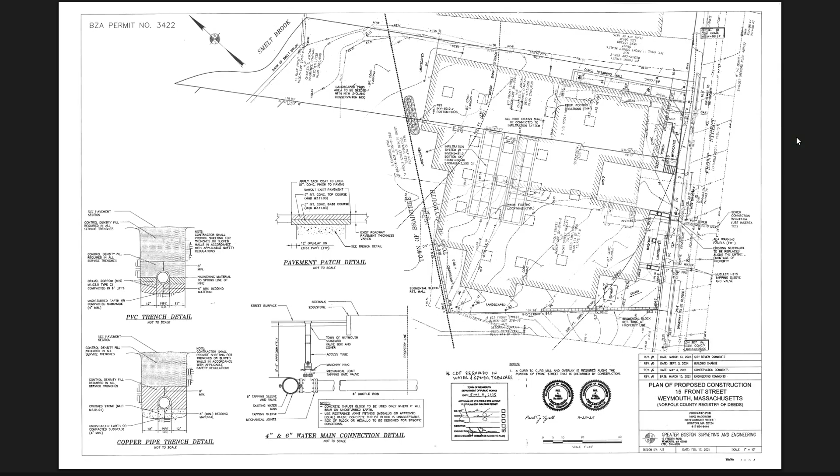It's 3 to 5. I gave Mr. Snyder a copy of the updated plan showing that area cut back from the property line to accommodate the neighbor. I have a copy provided by you, and it shows 9.3 feet is the closest point, and the next closest is 9.4 feet. Yes. In this particular zone, there's no rear yard setback requirement due to the overlay district.

However, the neighbor asked for that setback. And that was to accommodate parking on one level, is that correct? Yes, there'll still be parking only on one level.

That's the only change. He's got rid of, I'm pretty sure, 4 units plus the commercial area, which eliminated a number of parking spaces that would have been required under the bylaw. That was always an issue with the town, on the circulation inside to go from one level to the other. So all we're really doing is pulling the building further away from the property line on that side? Yes. Does the board have any questions?

And I'm joined tonight, as you just heard, by Michael Kaufman, the manager of the applicant, Matt Leidner, the civil engineer from Civil Design Group, and Daniel LaCivita, the traffic engineer from Vanasse. I'll ask both Matt and Daniel to make presentations of the plans in a moment, but I'd like to give a little background about the process we've gone through to date.

This is an exciting new project. I know the town's been waiting for something to happen here for a number of years. In speaking with the mayor's office and the planning department, they've been excited to see new development come into the site. They've heard a number of different proposals over the years, none of which have come to fruition, so they're really excited that this is finally moving forward.

This is proposing two new retail uses, both a supermarket use, which will go by the name of Sprouts Farmers Market, an Arizona-based company coming into the Northeast with one of their first stores. We're also proposing a drive-through only coffee shop by the name of Seven Brew, also of the West Coast, coming in with a small 530 square foot drive-through coffee facility.

Prior to coming here tonight, we've had an opportunity to work very closely with the planning department throughout this process, who introduced us to the mayor. We've had opportunities to sit down with Mayor Molisse, who's here tonight, I know. We've had great discussions with the mayor, been able to share the plans with him and get his thoughts and comments and concerns about the proposal.

One of his chief issues of concern, and he can certainly speak for himself, was to beautify this corner, as this is an entryway into the town. He talked a lot about the opportunity to utilize this corner of property to provide for a nice welcome-to-Weymouth sign, to welcome folks to the community. He was also very excited about the opportunity for new commercial growth in this location, and he talked a lot about the neighbors and neighborhood concerns. As you may know, the mayor lives right within this neighborhood, and he talked about the impact on Front Street, wanting to ensure the neighbors were not only heard, but their comments and concerns were addressed.

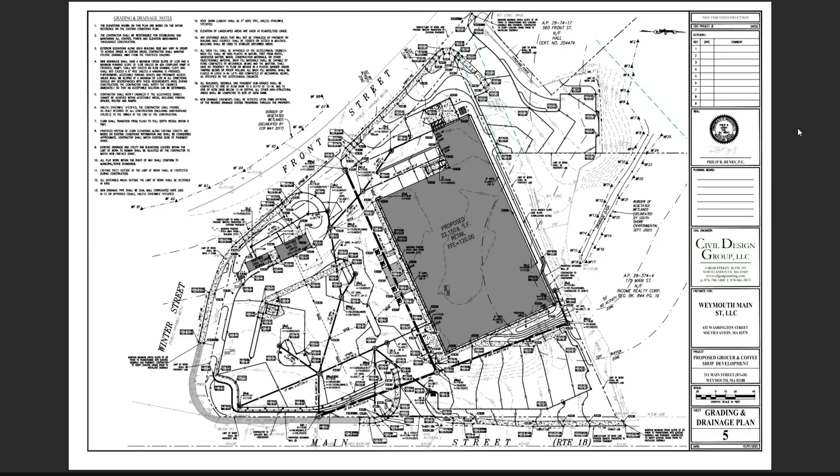Lastly, as far as utilities go, we're proposing independent water, sewer, gas, and electrical services for each building. The proposal currently is to have all those services come in from Front Street. However, we will continue to work with DPW, water, sewer, and the appropriate utility companies to finalize those connections.

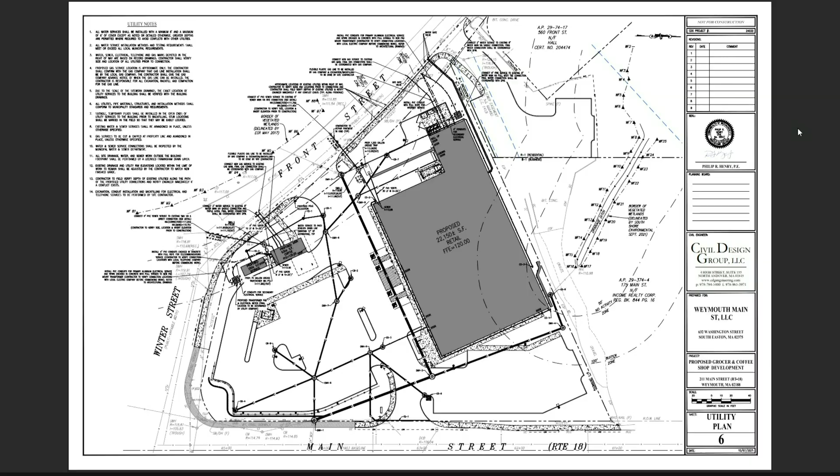Before I turn it over to Dan to talk about traffic, we did include some architectural elevations representative of what's proposed on this site. I can just scroll through them briefly — this is part of what was submitted to the board, and I wanted to show them as we go through here. This is the Sprouts grocery store building, front elevation on top.

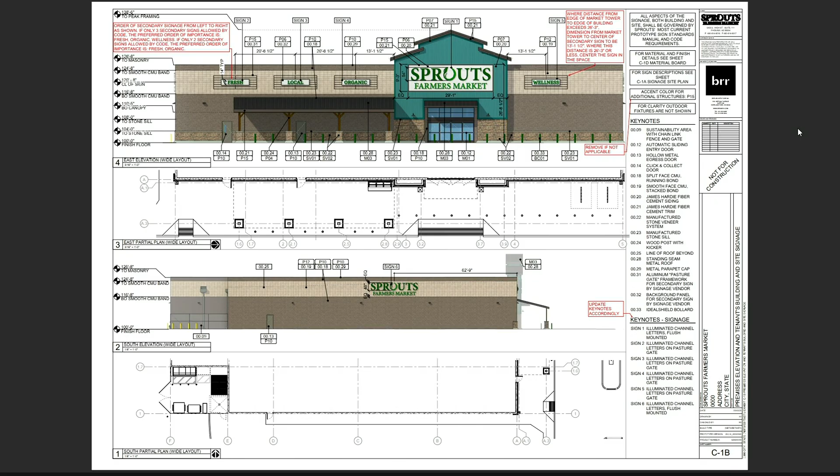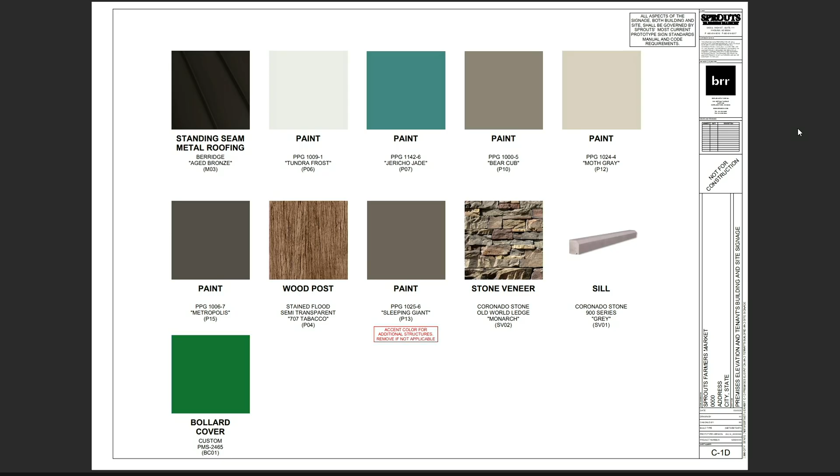After this presentation, I'm happy to go back to any of the slides and answer any questions. Here's the color palette and materials for the Sprouts grocery store, and this is the drive-through coffee, 7 Brew, along with a perspective view of that as well. So with that, I'll turn it over to Dan.

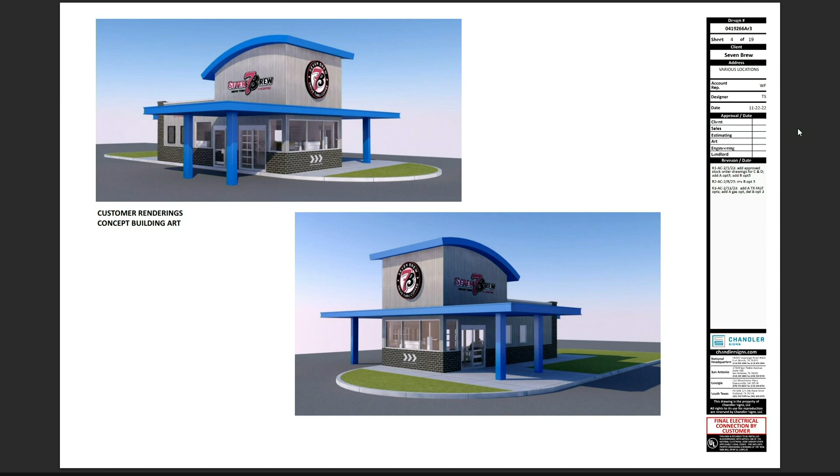Do you have a rendering of the storage building that's next to the coffee shop? No, we do not have a rendering of that building. The materials for it are identical to the 7 Brew's, but we could provide that for the next meeting. Okay, because that's going to be front and center on the site. Okay. Thank you very much, Matt.

Mr. Chair, if you'd like to have the traffic presentation? Sure. Once again, for the record, my name is Daniel LaCivita, I'm a traffic engineer with Vanasse Associates. What I'll do now is give a brief, high-level overview of the transportation impact assessment, or traffic study, we prepared for the project. The main goal was to assess the impact of this project on the surrounding transportation infrastructure, and to provide recommendations ensuring safe and efficient access to the project site.

And lastly, to determine any appropriate mitigation, whether on-site or off-site, as it relates to traffic and transportation. Additionally, the traffic study has been peer-reviewed by the Town of Weymouth's traffic engineer, Mr. Gillen. We are in receipt of those comments. We have not had time to respond to those as of yet, but we are working on responses currently.

While I don't want to put words into Mr. Gillen's mouth, from our perspective, it seemed that he was in general agreeance with the findings, results, and methodology that was used in the traffic study.

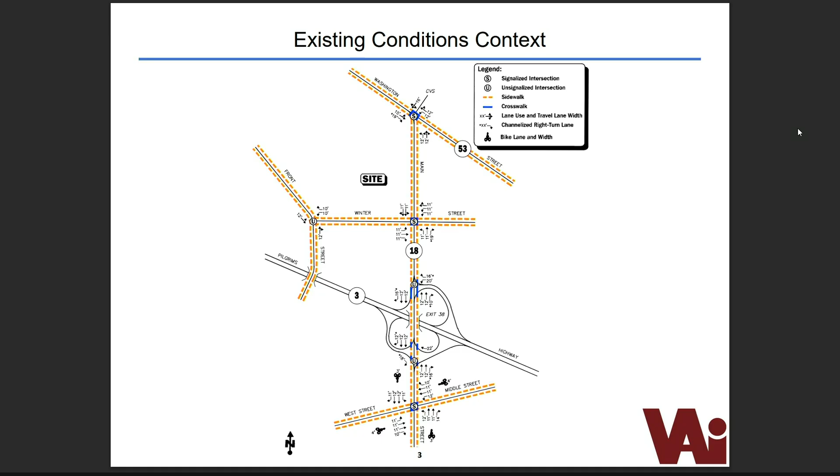Something else I will just note is that in addition to us doing the traffic study, and the city reviewing the traffic study, there will be a third set of eyes that look at it, that being Mass DOT, just given that Route 18 is a DOT roadway. The project will require a Mass DOT access permit, so they're going to go through and provide their own set of comments, recommendations, and make sure that everything was done in accordance with industry standards. We have not heard back from DOT yet, but we are advancing through the MEPA process, through which Mass DOT is currently working to provide feedback.

So maybe at future meetings, we'll be able to have some form of correspondence from them.

To assess the impact of the project, we essentially generated a no-build and a build condition, so with and without the project. And to do so, we estimated the number of vehicle trips that we expect to be generated by the project using data published by the Institute of Transportation Engineers, or the ITE, who are the industry standard for such estimations.

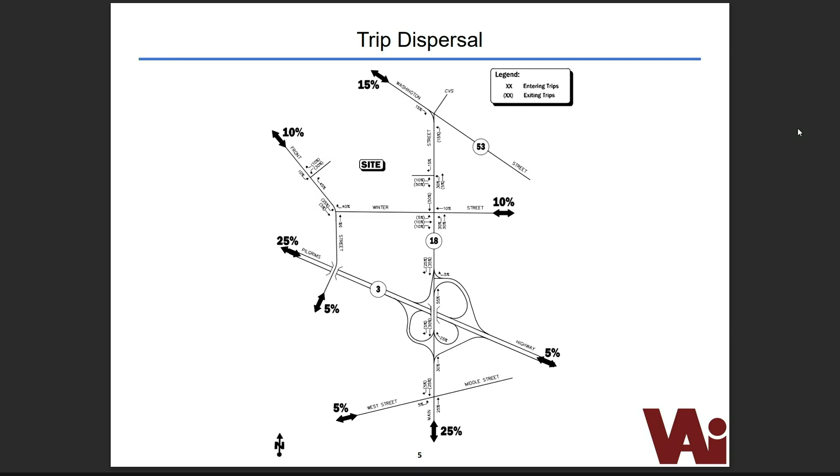However, as I've noted, there are existing safety concerns as well as existing operational constraints that we used to come up with the recommendations from the traffic study.

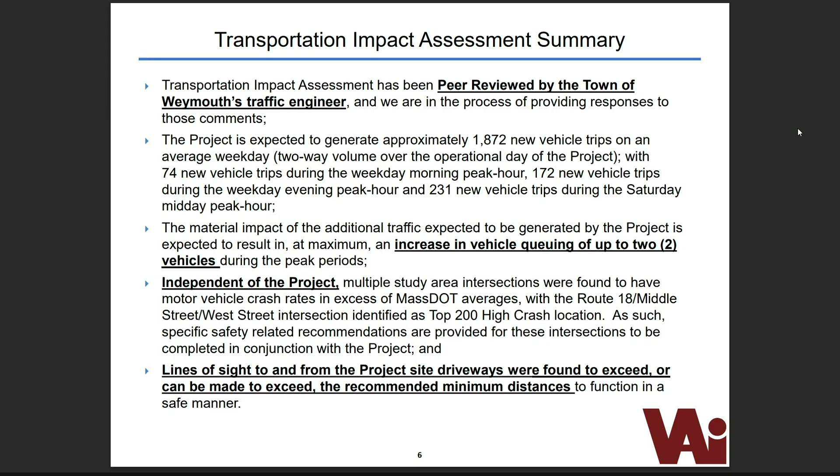And then using all of that, everything I've spent far too long talking about up until this point, we provided recommendations as they relate to site access and circulation, which were incorporated into the site plans that are before you, as well as a series of proposed mitigative measures at pretty much all of the intersections under study.

These include safety improvements that had previously been recommended as part of those studies. One thing I will note is that there's a little bit of crossover where those safety improvements are also a commitment for the redevelopment of the South Weymouth Naval Air Station. However, to the extent that this project seeks a certificate of occupancy or a building permit first, we are proposing to go forward and make those improvements because that is what DOT is going to require.

As well as the design and implementation of specific optimal traffic signal timing and phasing plans, once again with that specific emphasis on the Route 18 Winter Street intersection, to try to alleviate some of the congestion on Front Street.

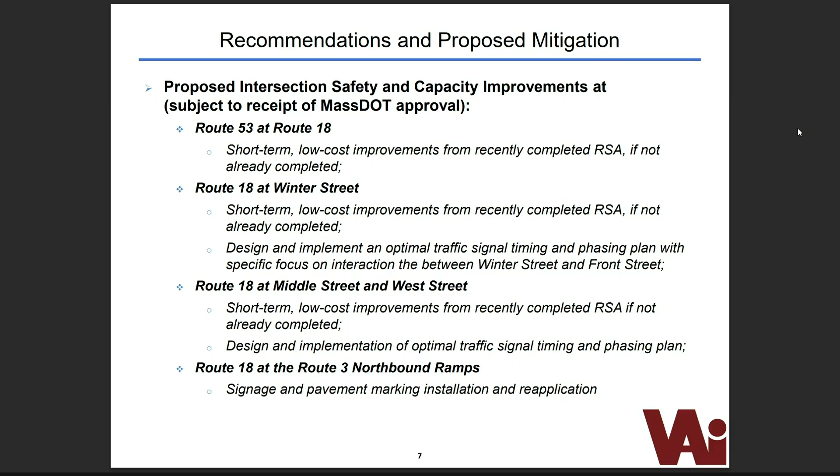I broke it. There we go, perfect.

I wanted to take a minute to highlight the operation of the drive-through for the coffee shop, because the way it's located, it's hard to understand exactly how it would operate. I had the pleasure of working with Jack Gillen on a lot of Dunkin' Donuts over the years, and I learned that the queuing of these drive-throughs is one of the most important factors. As you look at the plan, vehicles entering the queue will not enter up near Front Street, but rather will circulate into the site and enter the two drive-through lanes closer to the corner of Winter and Main Street.

The reason for that is to ensure that any queuing of traffic in the drive-through would not back up onto Front Street, but if at all, it would back up into the site itself. There are 2 lanes of drive-through traffic being provided, which is another kind of different design for this proposal as compared to other proposals.

These 2 drive-through lanes are actually serviced by folks within the facility who take customer orders and deliver the coffee to the customer as they sit in that drive-through lane. So you don't have to wait until you get to the window to pick up your coffee — often those coffees are delivered to you while you sit in the drive-through lane.

And with that, unless anyone else has any additions — so that's essentially our presentation for this evening, and we're certainly here to answer any questions or concerns the board may have. Thank you.

I think what we'll do is see if the board has any comments at the moment. I know there are a lot of people here that are obviously here for this project, and yeah, I'd like to hear them.

Just a couple of quick questions. Is the coffee shop sharing the trash facility of Sprouts, or does it have its own somewhere on this plan?

I don't — maybe who has the pointer? Is this the laser? It's the bottom, where do you want me to point this? The trash facility, if you look right behind you for the coffee shop, is right there.

That's the dumpster? Dumpster, okay, for the coffee shop, and back there is the dumpster area for the grocery store. So the answer to your question is no.

All right, and you said this is going to be a walk-up facility as well as a drive-through. Where would those people park if they were walking up to that building, and how are they going to get there?

The purpose of the walk-up, as you could see on the plan, we are showing a sidewalk off of the Front Street entrance, so as rare as it might be, we are providing for pedestrian access there. People also have the option of parking anywhere in the lot. There is no exclusive parking for any tenant if they decide that the drive-through queue is too long, and they can walk right into the facility.

From the parking lot? Yes, sir. The operator has indicated that there's very little walk-up traffic. However, there is a doorway provided with a walkway provided for that, but they would have open access to that parking lot. Okay, and does it serve food as well?

Yes, sir. But the facility itself is 500 square feet. An average Dunkin' Donuts is 2,000 to 3,000 square feet. There's no tables inside, there's no seating inside. It's strictly a to-go oriented business.

If I could just elaborate, is it just a walk-up window, or is the customer going into the building if it's a walk-up? No, there's no. It's customers just going to an outside window? Correct. Okay, so it's like a Dairy Queen, you go into that. Similar, yes, yes. Dairy Queen for coffee. Does the board have any questions?

The dual drive-through lane setup, is that used at other locations, or is that specific to this site? No, almost all locations that can accommodate that setup do it that way.

So from a town perspective, something's got to be done at that time of day, 7, 8 o'clock in the morning. Where exactly do you think there should be a stop sign, from Winter to Front? If there is one, it's in the middle, not by that sidewalk. I think it's a yield sign, right, not a stop sign. Nobody stops, it's a yield sign, so it's already a problem.

If you're leaving Sprouts or the coffee shop and going onto Front Street to take a left, it's already backed up. Nobody's going to be able to take a left during those peak times, coming home from work, going to school, going out afterwards. I don't know, it stinks because the school's down there, but can it be right turn only coming onto Front Street? Just other things to think about.

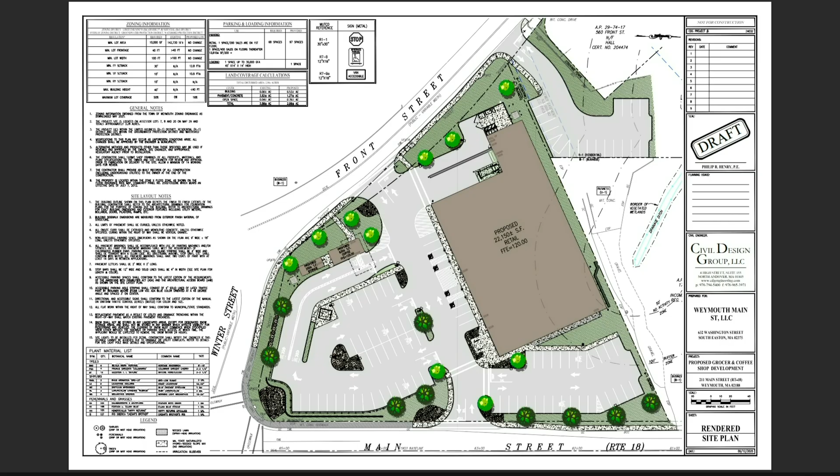We talked about timing to pick things up or drop things off, 9 a.m. or later, because you can't have trucks coming in between 7 and 9 when everybody's trying to get to work. If those trucks are coming down Front Street and having to back in, that's going to cause more of a problem when I'm trying to take my kids to school, and I think of a lot of other people too. So timing for deliveries, timing for pickups. Something's got to be done with the site. It looks very nice, I don't have a problem with that, it's the traffic that's going to show up if truck deliveries are happening at that time.

If you're letting them take a left out onto Front Street, I can't get from the other side of Front Street through because everybody's waiting to get on the highway. What are the hours of the school, do you know? You show up at 8:30 to drop off, and drop off depends, you get there a little early sometimes for study beforehand. But it becomes a problem for that.

And I don't want anybody walking near there, it's crazy time. Those sidewalks, as they say, are not great to try to cross. We go for walks the other way, and I'd rather cross over the highway to go for a walk with the kids than go down there. So, thank you, thank you very much.

David Larson, I live on 76 Belmont Street, so I'm not an abutter at all. I think it's a great plan.